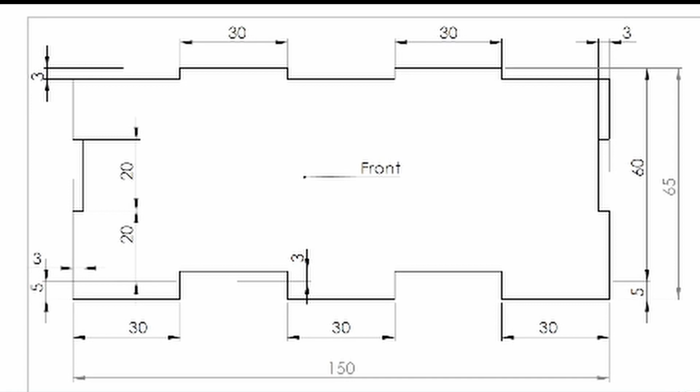And we're into our new part. Now what I'm going to do is put up one of the technical drawings on the screen so you can see it, and you should have a copy of these as you're working, and this is what we're going to work through. I'll move these around as I'm doing them, but keep it up in the top right hand corner of the screen so it's out of the way.

So I'm going to create my front part first. We can look at the measurements and see that we're 150 across and 65 high. So we can start by, when we first start, we've got nothing on the screen. We're going to use a plane to draw from first, just so we've got a point of reference, and then we'll draw from the rest of the sketch after that.

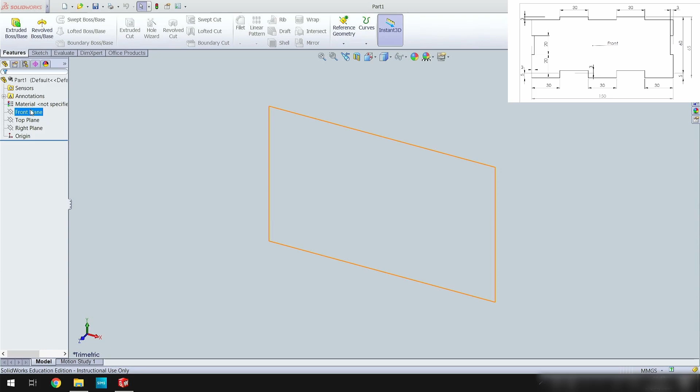So if I click on the plane, the standard practice for this is you click on the normal to symbol here. So the fourth one along is the arrow pointing away from it, the perpendicular symbol. Click on that and I'll face that plane. This works for any surface. I can then click or right click and I'm going to press sketch.

That means sketch on this plane. So I'm now sketching on that plane. We can't see it, that doesn't matter. It's effectively the piece of paper we're going to draw on. Just imagine it's an invisible piece of paper. So I'm going to take my rectangle tool and I'm just going to draw a rectangle.

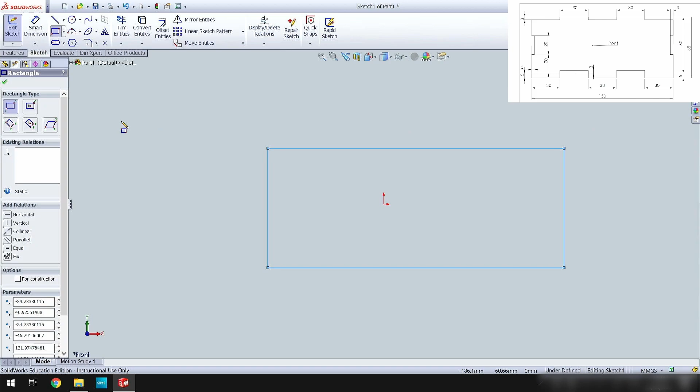I'm now going to smart dimension it to give myself that 150 across and that 65 high. So I'll take my smart dimension tool and start with my cross measurement, click on there, I've clicked on the line, and then I'm going to move away from the line a little bit, it doesn't matter where, and click again and it lets me choose my dimension. So I want this to be 150, so I just type 150.

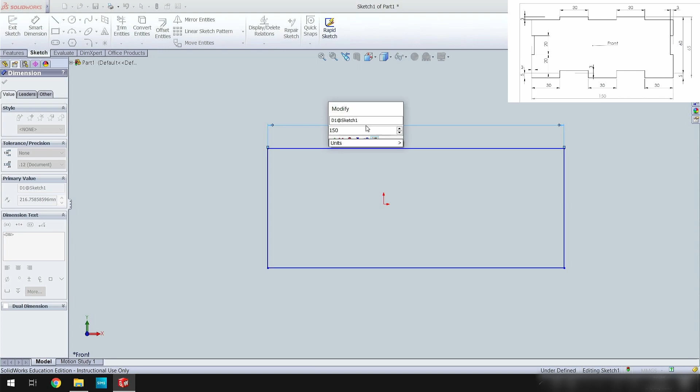You haven't got to worry about putting units in if you've already preset it to millimeters, grams and seconds. And there we go. If you want to check you've got the right units of measurement, go down to the bottom right hand corner here and you'll see mmgs. If you see ISO, or IPS sorry, then you want to change it to mmgs. So I'm going to change it to IPS now, and then I'm going to change it back.

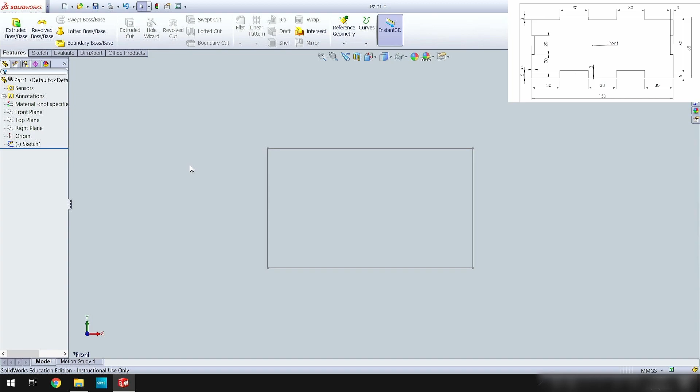The reason I've done that is because some of you might need to change this and you'll encounter this issue. Your drawing will go grey. What you've actually done is you've exited your sketch, and you can't edit it until you go back into it. And to go back into it is really easy: right click on the sketch and you can press edit sketch there. And now I'm back in it.

So I've got my 150mm across. Let's do another smart dimension to get my 65mm high. So I'm going to hover over the line, the line goes orange to indicate that that's what I'm selecting. I left click once, I move away a little bit, and I left click again. And this becomes 65, and there we go.

So I've got my actual outline, but now I need to put all that detail in there, and it looks like a lot, but it's not too much.

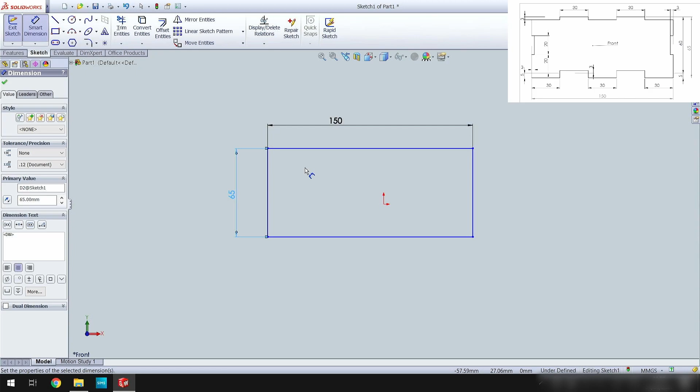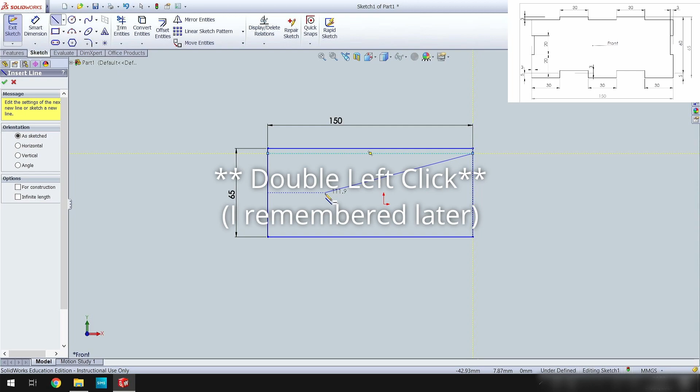So I'm going to draw a line here. Once you've drawn a line, if you end up with this, the line tool is trying to draw another line from it, assuming you want to keep drawing lines. You can either left click on the line tool itself and it will disappear, or you press enter twice and it disappears. Whichever works easiest for you.

But I do need to draw another set of lines, a few of them, but I'm only going to draw one line, and we're going to use some fancy tools to make things work for us. So I click there, I've started on the line.

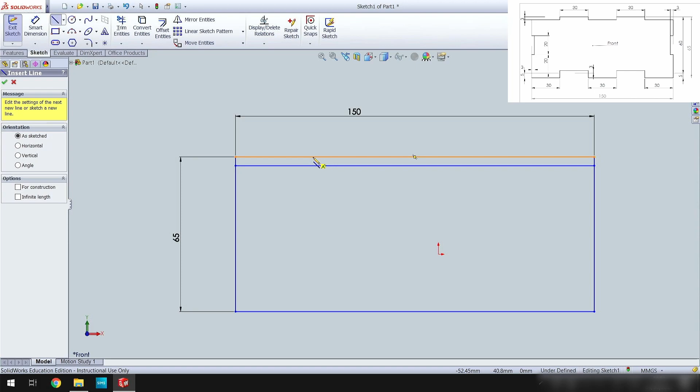If I start that again just so you can see, I've got my line tool and I'll zoom in. To zoom in, you just scroll backwards on the scroll wheel on your mouse, the middle mouse button. It's a little bit counterintuitive, you'd think scroll forward and you zoom in. It varies from CAD software to CAD software, but a lot of them have this in common. You get used to it after a while.

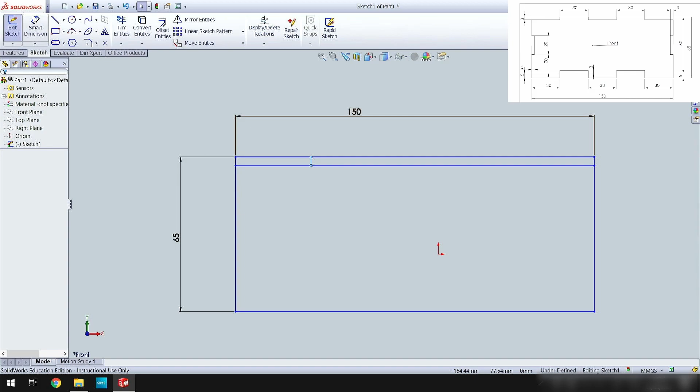So I'm hovering over that line and I left click. And I'll hover over the next line and I left click. What that's done is anchored the line I've drawn to those points there. This allows me to smart dimension that line.

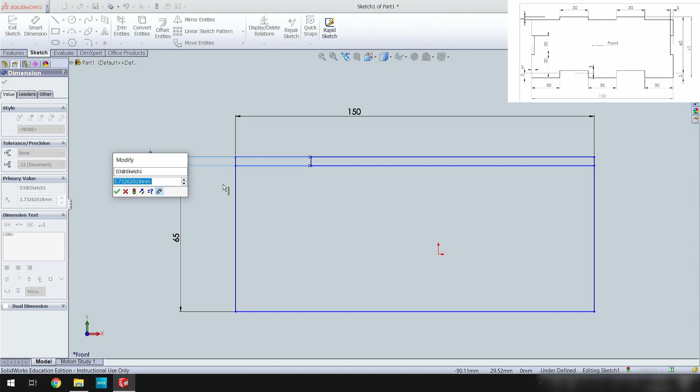I'm going to move it over here just out of the way, and when I adjust this, the top line can't move because that's already anchored as part of that rectangle. The bottom line hasn't actually got an anchor other than this line here, which means if I adjust the measurement, that line will move. I want to make this 3mm, as we can see in our diagram. There we go, that's still 65mm high, and that's now 3.

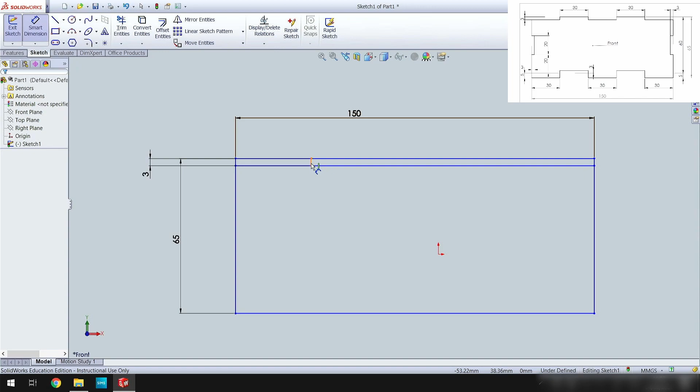So I'm now going to do this first measurement here, the 30mm, and I'll smart dimension from the line. I'll click on that, and now I'm going to click on this line. That means it's from one line to another line, and that's how I do my horizontal. I'm going to put it up here so it's out of the way, and this needs to be 30mm. There we go, that's moved, but nothing else has.

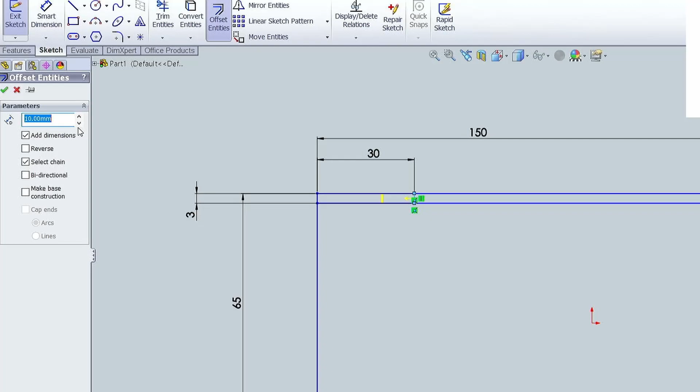What we're going to do is exit out of our smart dimension. We're going to click on this line here, and go to offset entities. Offset entities means repeat the measurement, repeat that entity or line at a certain distance. We're going to change our distance to 30, and you can see a little arrow here telling us which direction it's going. We can press reverse and it goes the other way, and just press the green tick.

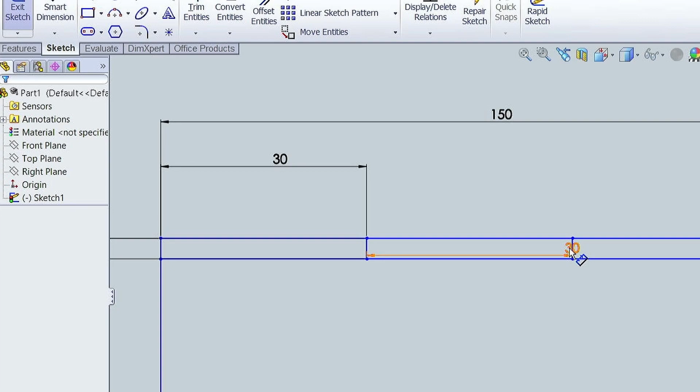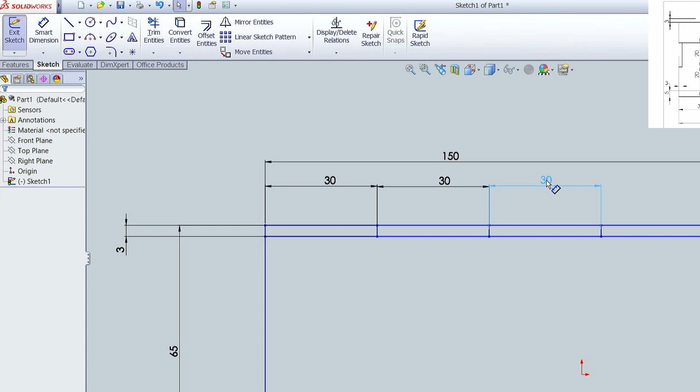Now if I zoom in a little bit, I can take this measurement and move it up here out of the way, and I can click on the next line, offset entities, reverse, okay, move my measurement out of the way, click on my line, offset entities, reverse, okay, and that has given us all those lines.

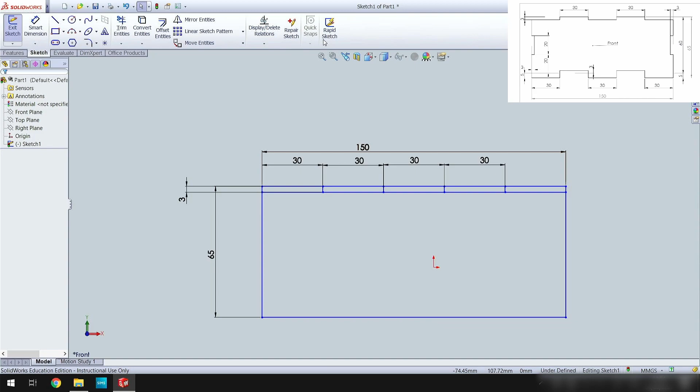So now I want to repeat this line and those 4 lines down here. Because of the difference in measurement here, we'll redraw them, but we need them at a different height. So it makes it a little bit more complicated, but it's not the end of the world.

So what I'll show you here is a little trick you can do. If you take this point here, go from the end node, end of the line, and go straight down. And you do this for all of the lines.

We use a different tool instead. One of the advantages of this sort of CAD software is there are lots of different tools you can use. The downside is trying to pick which tool is best at the right time. If you end up using the wrong tool, it can make your life a little bit more complicated. Sometimes using the simplest tools is the easiest way to do it.

Okay, so I'm going to draw this line across here now. But we need this gap to be higher. So let's have a look at what this gap needs to be. Well, if we look at our drawing, we've got it at 5mm here, and we've got 3mm here. So we need this at 8mm total.

Alright, so there's a lot more we need to do here. So let's have a go at this then. We will smart dimension from the bottom to that line there. Let's make that 8mm. There we go.

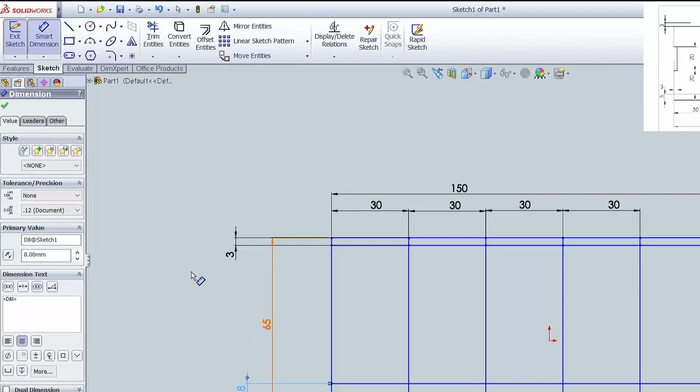Now we can use the trim entities tool. Trim entities just cuts away part of it. You've got 5 different options here, you want the bottom one, trim to closest, and this just trims the line to the closest intersection. So this is our closest intersection here and here, so we click on this line and it'll go.

And we're left with this here. Now if we look at the design we've got, at the bottom we need 3 feet, 1 in the middle and 2 on the outside. So I'm going to use the same tool, trim entities, to remove that part there and that part there.

And then we want to make this solid here, so I'm going to remove the alternate parts of this line up here. Now you see this black line here, that's a measurement line, so not part of your drawing, that's just giving you reference to your measurements, so don't get confused by that bit.

And we need to do the complete opposite up the top. So at the top we need 3 low parts and 2 high parts, and these are going to form our finger joints. So I'll make this one here. It's easy to not see that because you've still got the black line.

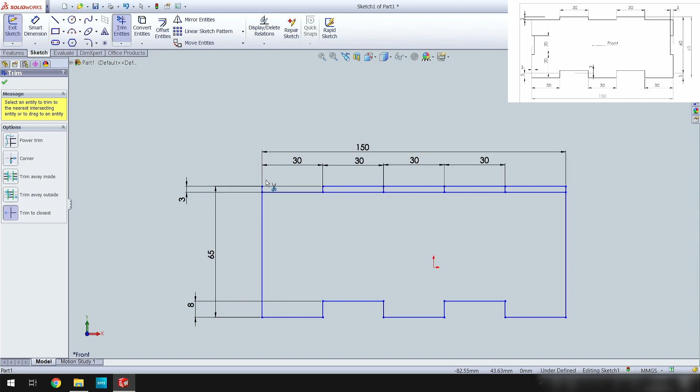You're looking for these circles on the nodes here. The circles on the nodes identify endpoints. And I can alternate this one here, that one there.

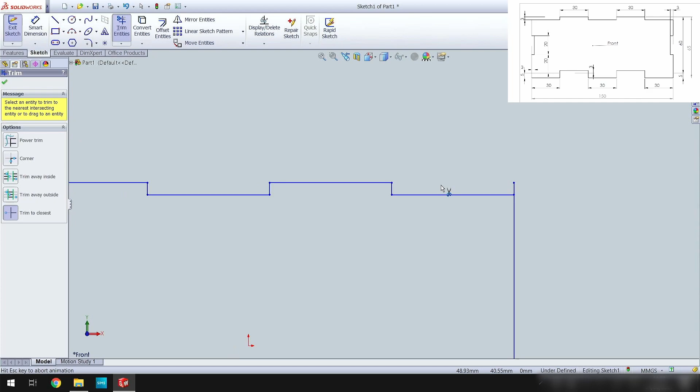If you want to move across the screen without zooming in and out, hold Control, then hold middle mouse button, and you can just move the screen across. And if you press F, it zooms to fit the screen.

I need to get rid of these little bits here, because if I don't get rid of them, it will cause problems with my design. Because the next bit, it says here this has an associated dimension. What this is saying is you've set the height of this line. If you delete it, it's going to get rid of that height. That's okay, we can always repeat that height just to keep it there.

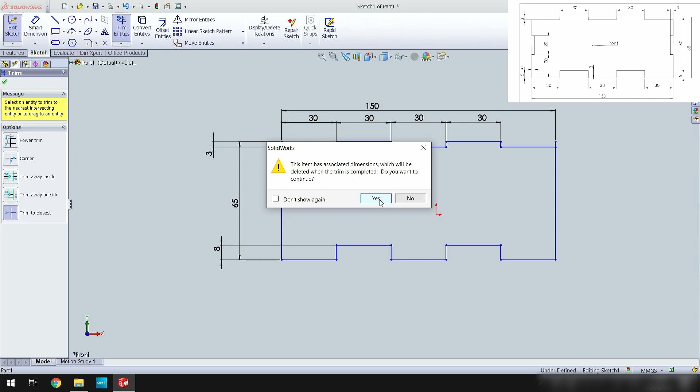I'm going to leave this one here to show you the problems it can cause. So I'm now done with this, apart from these side bits here.

And we will mirror this one because this is identical. And what we'll do is we'll smart dimension this, so this bit here has got to be 3mm wide, and the top of that to the top of this bit here should be 20mm.

Now see there's a problem there, that's adjusted that height there. So what we do before that, we'll smart dimension the height of that at 65, and we'll delete that one.

And now we can adjust that. There we go. And now we can do the smart dimension for that one at 20 as well, and it all works out.

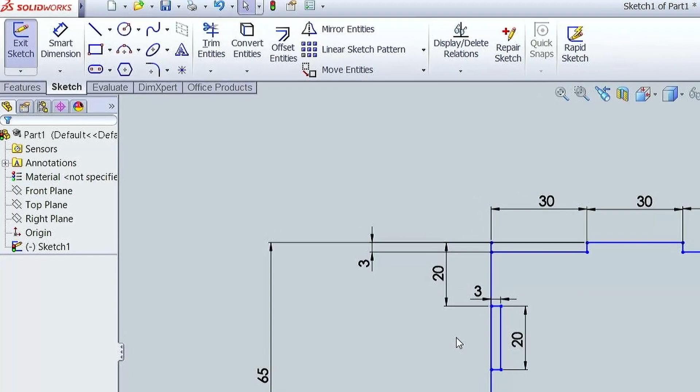What I'm going to do is I'm going to select that line. In fact, I won't select anything, I'm going to draw a centre line first. When I go to my line tool, on the little arrow here, I can press centre line. And then on the middle part, if I hover over the middle of it, a little red box with two diagonal lines comes up. That indicates that that's the centre of the line.

So I can click on that and it snaps to the centre line node. I can do the same thing here, and even if I hadn't, you can see the yellow lines coming off. These indicate the common direction, so these are perfectly perpendicular. If I hover at this angle around here, it sometimes will give me a diagonal line at 45 degrees, but for now I'm happy for it to just do this.

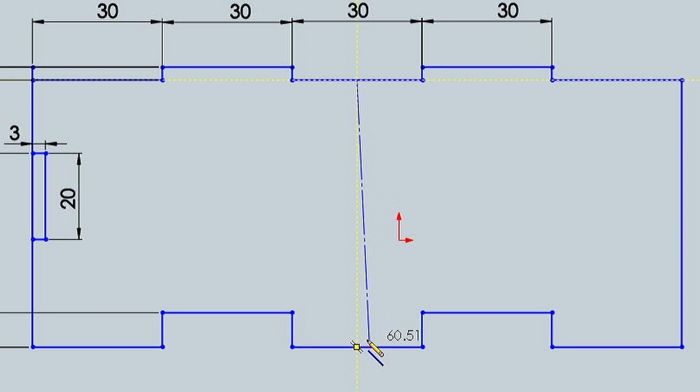So I've got my centre line. I'm now going to go to the mirror entities tool up here, and it asks me on the left, what entities do I want to mirror? Well, I want to mirror that, and it appears there, line 21, that, line 24, and that, line 23. And then mirror about.

So where's my line of symmetry? That's what it wants to know. Well, here is my line of symmetry. So I click on that and it previews it over here. I can press the green tick tool and it appears there. And that's just saved me the hassle of trying to draw it.

And now I'm going to use my trim entities tool again. And on the right side, it's quite quick. I remove this one little line, done.

On the left side, we drew a rectangle, and rectangles have four sides. So if I press this, it's either going to delete part of this initial line or part of the rectangle, but not both. And you can see it's done that because this line's gone very thin, but this has stayed thick, showing me that there's a mismatch between the number of lines in that area. I can click it again, and now those lines have gone back to thick, and that line is gone.

That's all done. Now we're going to finish this and attempt to do the next section, but I'm going to leave this line here deliberately to see what problems that can cause, and I'll show you how you can solve it. The best practice is to get rid of this. So if you're aware of it, get rid of those little lines, they can cause problems.

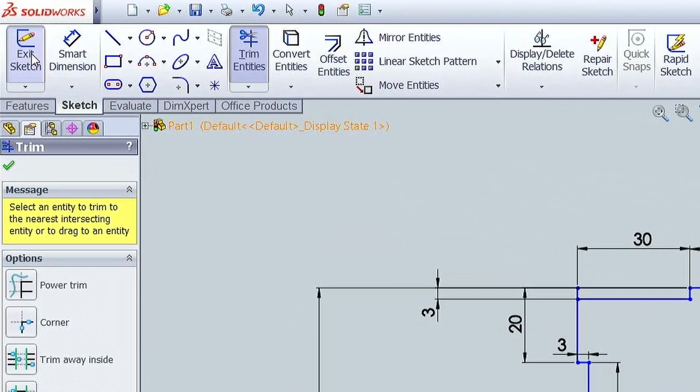If I exit my sketch, and I'm going to select my sketch in my parts tree on the left, I'm going to go to extrude boss and base, and what this is going to do is take the shape I've drawn and pull it out into a 3D shape.

So I press extrude boss and base and it moves it around for me, and instantly nothing's happening. I can press this selected contours tool and choose that, and then I get these to appear, but it's because of that line there it's caused the problems. The center line won't be helping, but that's caused more problems.

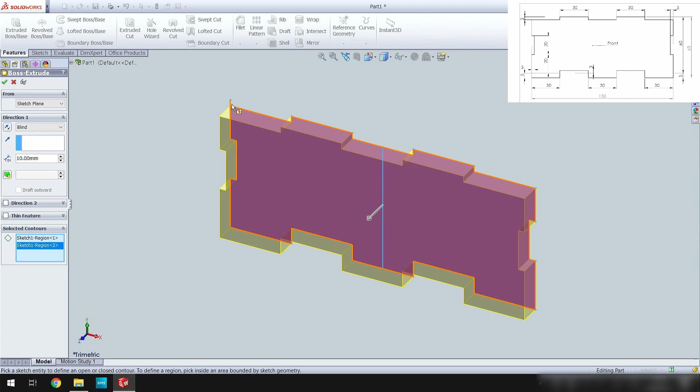So because we should be doing this the right way around, I'm going to right click, edit sketch, trim entities, and I'm going to get rid of that little line.

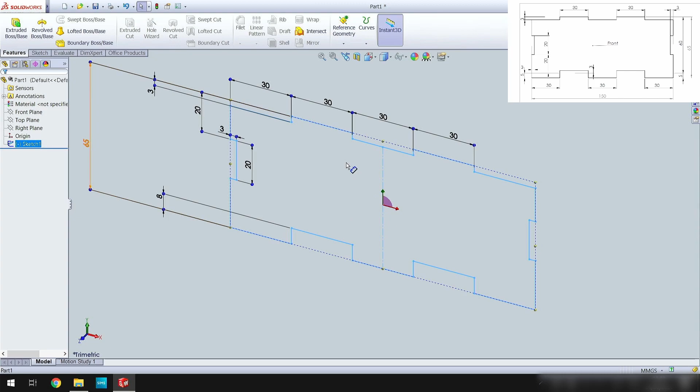I can exit my sketch again now, select my sketch, you see it highlight blue and then everything will appear, extrude boss or base, and instantly it selected that entity. It selected the contour to extrude. So you know it's right if it selects it automatically, often.

And now what it wants us to do is select the depth. So the depth of this is going to be 3 millimeters. And instantly it adjusts itself, and if it's yellow it's a preview. So this is what it's going to look like.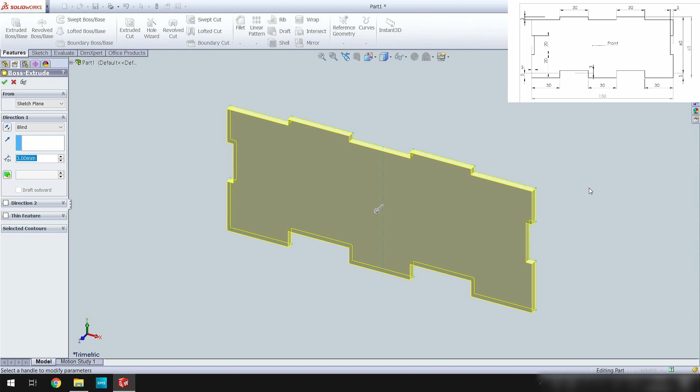If you need to, you can look around it. To do that, click on anywhere on the screen with the middle mouse button. Push down on the middle mouse button till you hear a click, and a little rotation symbol will appear, and you can move things around so you can see them from different angles, so you can have a better look at them. It's a really handy tool, a real big advantage to CAD software.

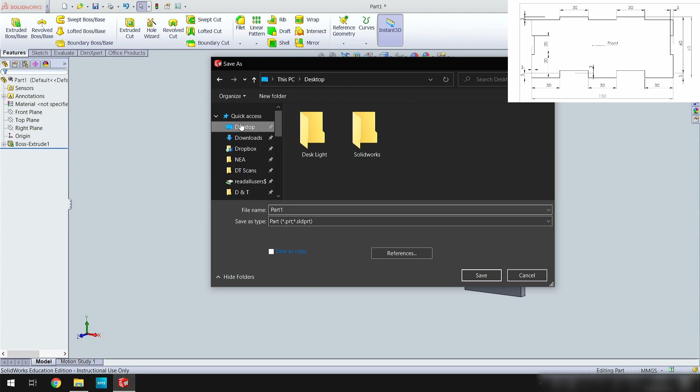I'm happy with that. I'm going to press the green tick, and now, very importantly, I'm going to save this. So File, Save As. I'm going to go to my desktop, Desk Light, and this is going to be called front. Make sure you give things appropriate names so they're easy for you to find when you need to.

Right, that's the first part done. Good luck.